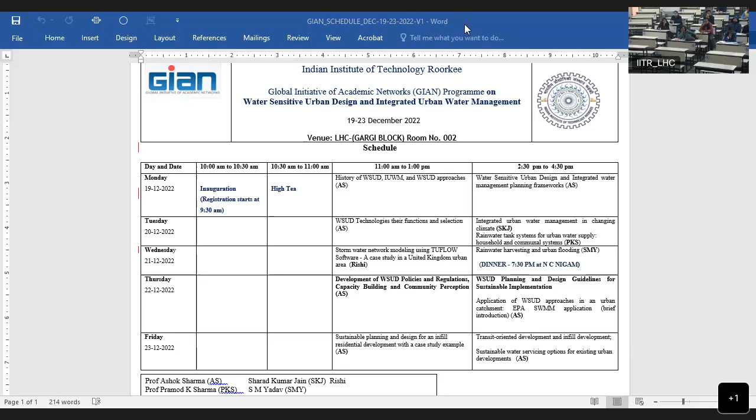These are some of the aspects we'll be covering, and then the climate change aspect Professor Jain will be talking about, and Dr. Sharma will be talking about rainwater. So we will be covering different aspects of urban water systems during those 5 days. This is a general introduction of what we're going to cover. I will start my first lecture on the history of water sensitive design, integrated water management, and decentralized systems. Just give us a minute, and I will go to my slides.

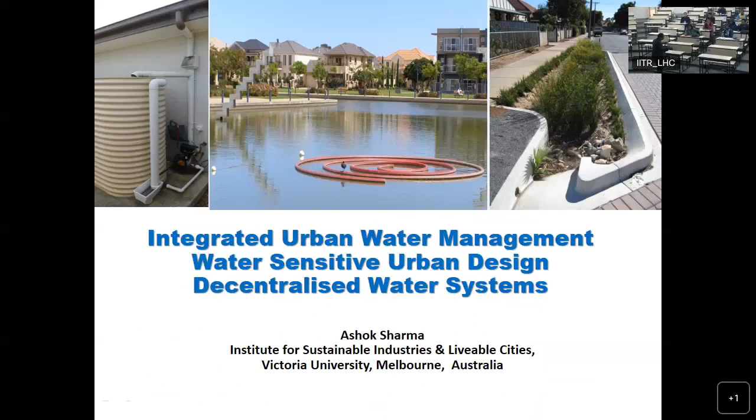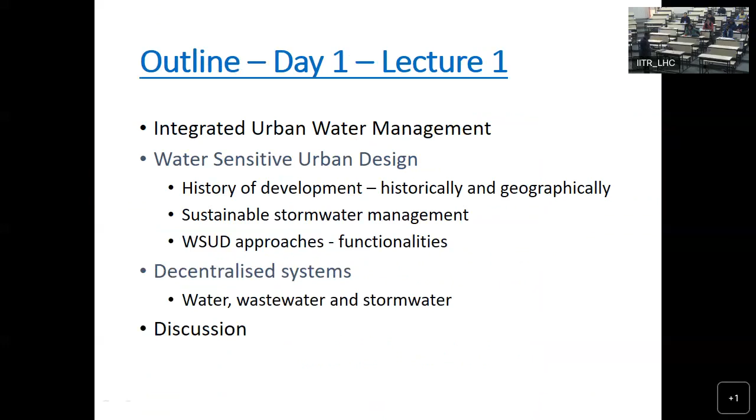So to start with, we will talk about what is integrated water management, water sensitive design, the history, and decentralized systems, and why we need to move from conventional systems to integrated water management. This is a general outline, and at the end we'll have some discussion about these types of systems. So why do we need these approaches? Because our existing conventional systems, which are normally centralized, are facing different constraints or challenges. One is population growth, resulting in urbanization, and climate variability, as there is a lot of discussion nowadays about climate change.

There will be different patterns of rainfall over time. There is a lot of work going on predicting what will be the impact, the expectation in future, and the nature of rainfall and evaporation in future. Because of that, there will be an impact on the existing water sources. That will also have an impact on stormwater systems because of the uncertainty in the intensity of rainfall. So we have to think about what impact that is going to have on our stormwater systems.

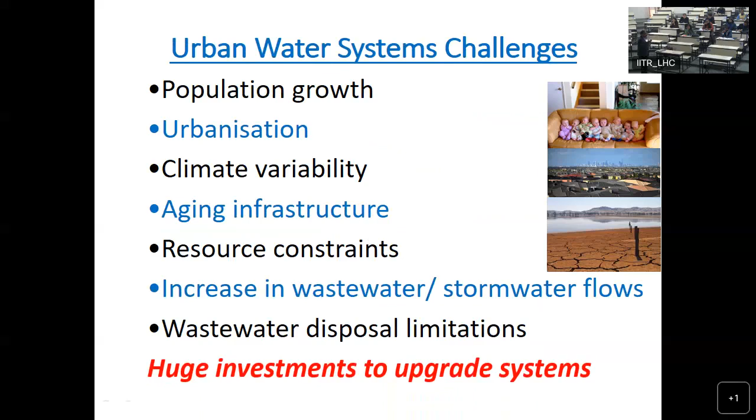But what is happening is that we are treating that water and supplying it to the urban areas, and from there, the stormwater and wastewater is collected or treated and then disposed to the receiving environment. But what is happening in the areas is that all the corners are expanding, so the boundaries are expanding. And also within the cities, there is a change in the density. So the demand for water and services is increasing further. And because of that, the existing system may not be sufficient in terms of sources and infrastructure capacity.

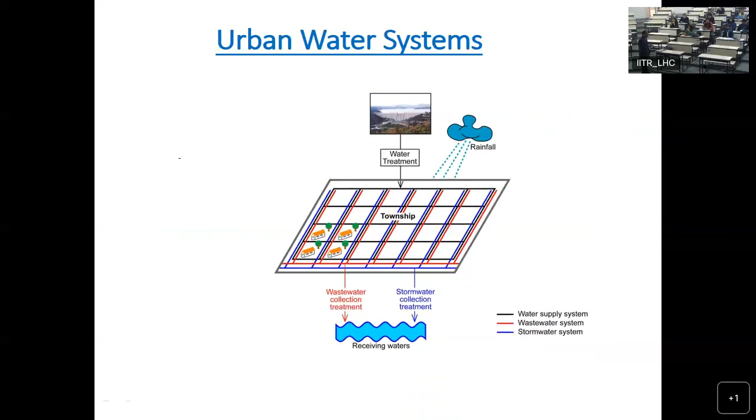So what can be done to some extent is that we can think of providing some approaches at the allotment scale by having rainwater tank systems. We can also have grey water applications, and we can also provide some type of stormwater detention approaches at allotment scale. And these types of approaches can be utilized in the existing environment and also in new development areas too.

And the second type of approach can be utilized at a larger scale, which can be cluster scale or development scale where new development areas are coming up, where we can have localized wastewater treatment and reuse. We can have communal rainwater tank systems, and we can also have water sensitive design to mitigate the impact and reduce the flow of stormwater.

So there can be different approaches, and that means we are talking about a hybrid type of system: one layer of centralized system, and we are putting another layer of decentralized systems. So these can be the future approaches which are being implemented in some parts of the world to see how we can reduce the expenditure on infrastructure by adopting alternative systems.

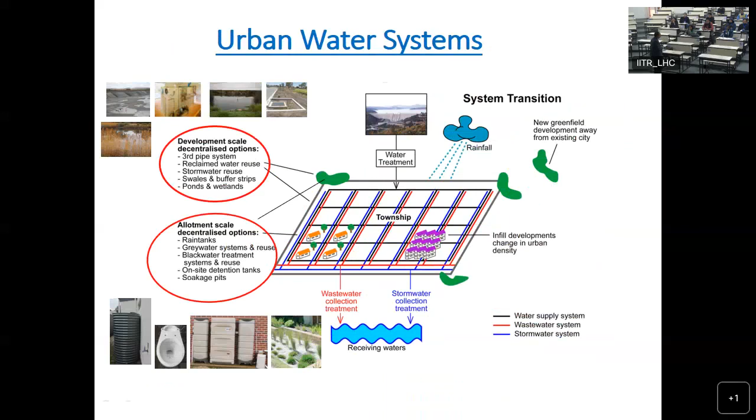So if we take the definition, there are a number of definitions of integrated water management, but this is one which is quite commonly used. Integrated urban water management is a comprehensive water management approach that demands consideration of the whole urban water system, from supply catchment to the receiving waters and all physical and non-physical influences on its performance.

For the system boundary, integrated water management approaches should cover from the source to the disposal point. In between, we have the whole infrastructure. So we are looking at the urban cycle as a whole, not only the urban areas, but where the water is being received and where the water is being disposed, the impact on the receiving environment and the impact on the environment from where we are taking the water. So integrated water management should cover the complete boundary of that environment.

And also we are talking about multiple stakeholders. So integrated water management also very closely considers the requirements of all these stakeholders.

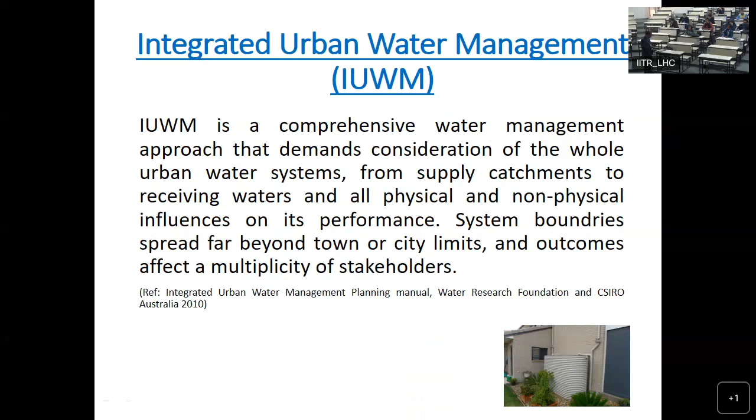There is another definition which is also widely used: integrated water management promotes a coordinated planning approach to drinking water, wastewater, and stormwater services that takes into consideration the broader implications of sustainable development, including energy demand, greenhouse gas emissions, waste generation, nutrient losses, life cycle cost, and community acceptability. So the community should be part of the overall implementation of integrated water management approaches.

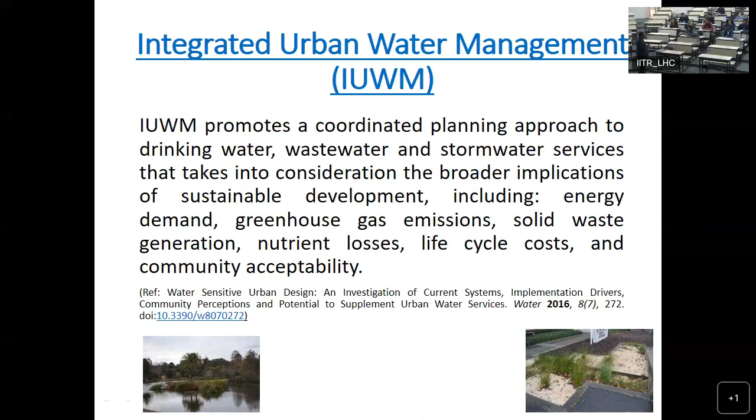What happens is that in many new development areas, there is no community, no one is living there. So normally we take the information about community acceptance from areas where communities are already living. So the information about liking and disliking of various systems, because with integrated water management approaches, there is a responsibility of the community too to manage some of the systems, which we will talk about later. The second type of approach which we normally talk about a lot is water sensitive design.

The definition which the Australian government developed is basically the integration of urban planning with the management, protection, and conservation of the urban water cycle. So the urban planning should include the protection and conservation of the urban water cycle. That ensures urban water management is sensitive to natural, hydrological, and ecological processes.

So the water sensitive design basically should integrate with the urban plan. That's the most important aspect of mitigating the impact of those challenges which we talked about. And mostly it is focused on stormwater management. And the idea is how we can reduce the pollutant loads, which have increased because of urbanization, and how we can reduce the overall flow into the natural environment or the receiving environment.

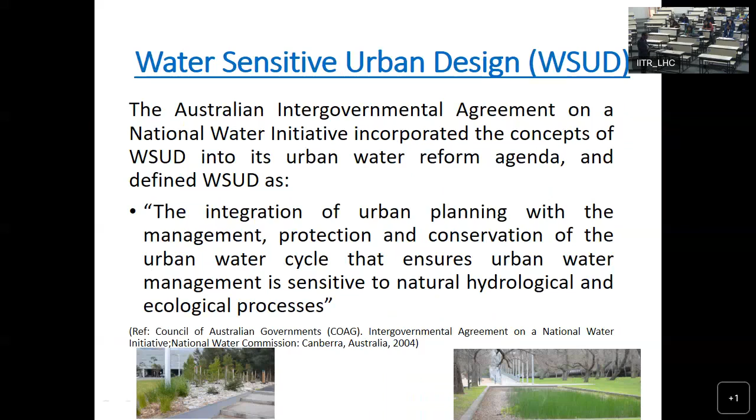So decentralized systems are basically systems that can provide water, wastewater, and stormwater services at the cluster, meaning a group of houses, or at a development scale, and that utilize alternative water resources, including rainwater, wastewater, and stormwater, based on fit for purpose. The term fit for purpose is the most important aspect: whether the source which is available is suitable for drinking or potable purposes or not. For example, in many rural parts of Australia, and maybe in India too, rainwater is one source for drinking purposes.

The wastewater which is locally treated can be utilized for irrigation of parks and gardens, and even the gardens which we have at house scale, allotment scale. So decentralized systems can be managed as a standalone system or integrated with a centralized system, meaning they can be part of a hybrid centralized and decentralized system. The advantage of this type of system is that wherever we are generating a resource or the resource is available, the network is very small.

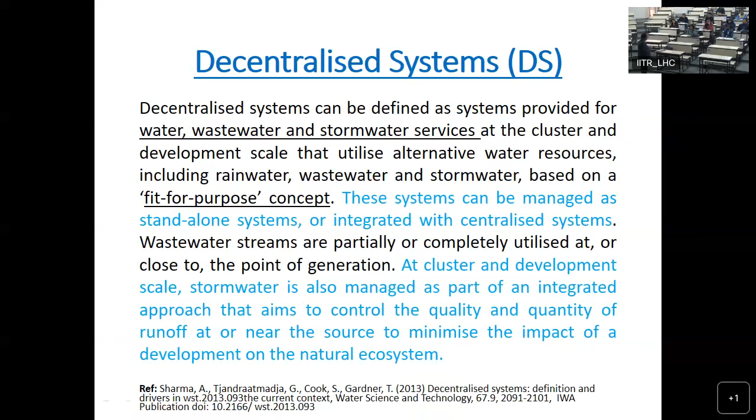Whether it is a supply network, a communal rainwater tank system or an individual rainwater tank system, we are treating the water of a few localized houses and supplying it back to the houses fit for purpose. Fit for purpose for wastewater is normally toilet flushing or garden watering. These types of systems are becoming very common in many parts of the world. In India too, rainwater harvesting is becoming a lot more popular because of those challenges. We will have one complete lecture on rainwater harvesting, modeling, and all those aspects. So these are some of the types of decentralized systems for water supply, wastewater treatment, and stormwater harvesting and reuse.

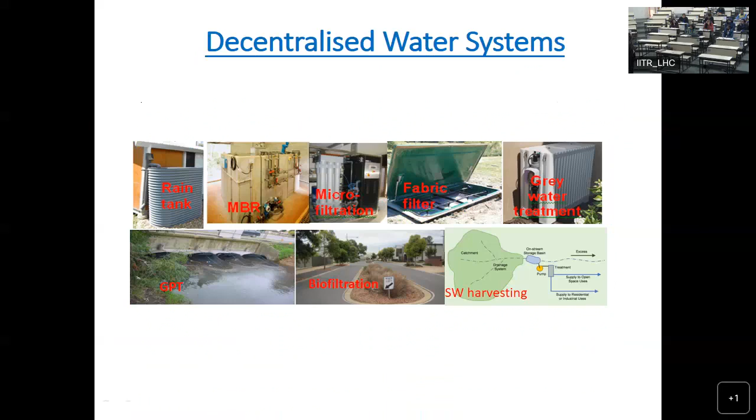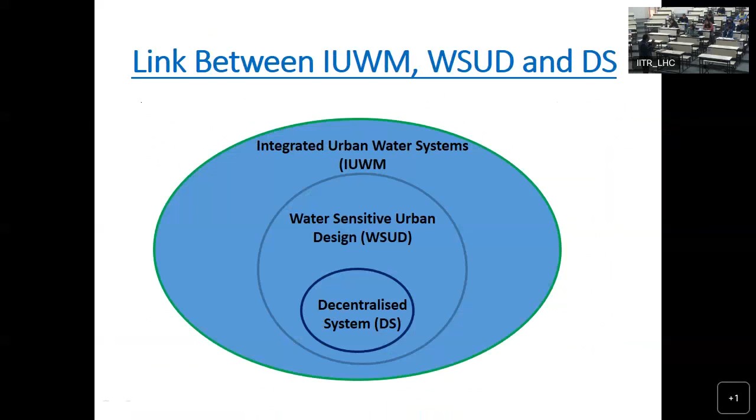Overall, if you see the link between integrated water management, water sensitive design, and decentralized systems, integrated water management is the overall picture, where decentralized systems and water sensitive design sit. So basically, everything is linked together in the overall planning of integrated water management approaches. We all know about the water sources which are available, and they should be utilized. In a decentralized system, it is a localized water resource: rainwater, wastewater and grey water treatment and reuse is possible. And sometimes we use a combination of various resources.

So for planning a new suburb, we will be sharing software which will help in looking at what resources can be utilized where, what impact that will have on potable water supply, and how much we can sustainably reduce the potable water supply from fresh water sources. The most important part to keep in mind is fit for purpose, and another aspect which is commonly implemented and encouraged by the government or water utilities is demand management: how we can reduce water demand, and to what extent.

For example, in Melbourne we have a target of 155. So one person should not utilize more than 155 liters of water per day. Earlier it was more than 250 or 260. Because of water shortage over time, they tried to encourage by different means how we can reduce water demand. So water conservation and demand management is a very important aspect of overall integrated water management.

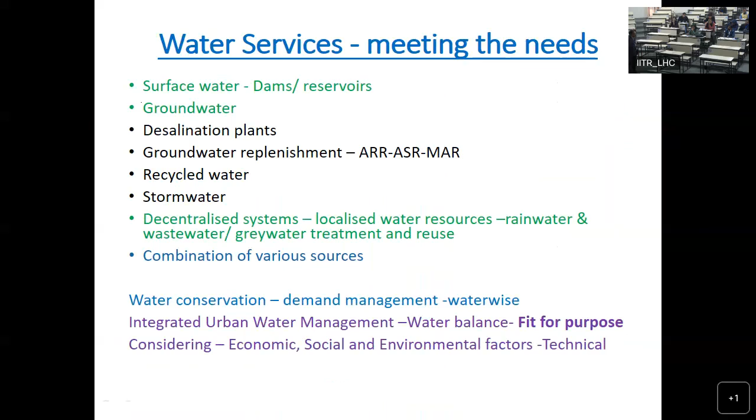So we talked about the total urban water cycle, and you can see that in the overall urban water cycle, the catchment, the urban area, and also looking at the alternative water sources which can be generated within the urban areas. And there is a lot of potential to utilize those resources.

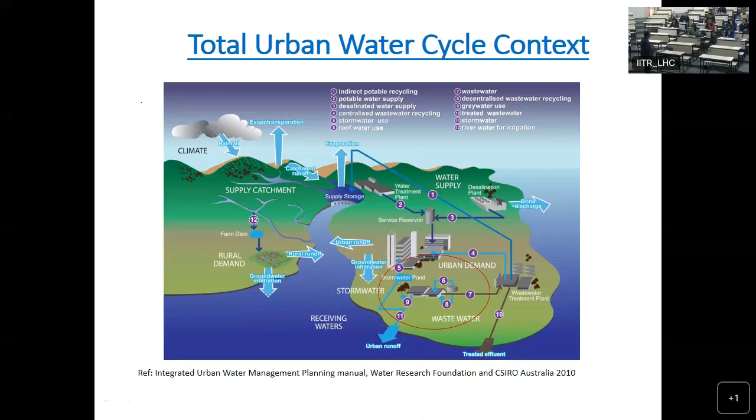As you can see in this diagram over here, there are decentralized system approaches which can also be implemented in looking at the overall total urban water cycle context. So decentralized systems, water sensitive urban design, has a very good potential and is an important aspect of overall planning of water systems in future.

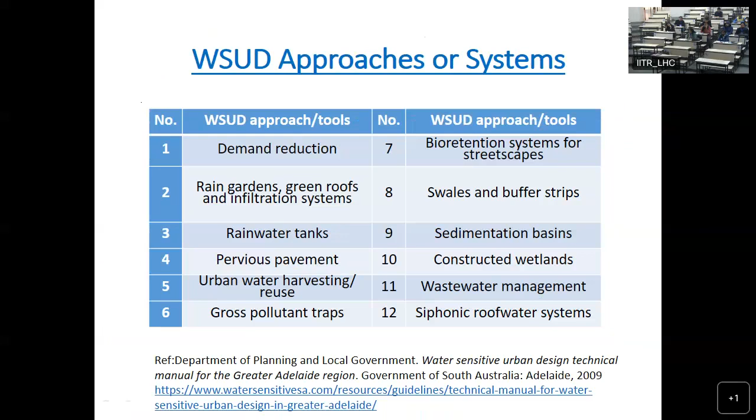Wastewater management locally and the siphonic roof water systems. This is basically what was developed at Adelaide University locally, but it has also been included in the water sensitive urban design approaches by Greater Adelaide Research. So we'll talk a little bit about these systems in our presentation.

So drivers for water sensitive urban design approaches. What are the benefits of providing these types of approaches or systems? Basically, since 1980, urban planning and development has increasingly taken into account the natural water and nutrient cycles, with water flow managed as would have occurred on the original greenfield site.

Basically, what we are talking about is that when we have a new urban development, whatever flows were coming at that time from that area, we will try to manage so that similar flows are there once the development has taken place. That means the nutrient loads, the flow, the peak flows, should be managed at the same level. And to do that, we have to apply water sensitive urban design approaches.

Basically, the idea is this way we can protect the ecology of our natural systems, because the water is finally discharged to natural water systems. So basically, these types of approaches can manage the stormwater quality and quantity, which is very essential. Otherwise, the flora and fauna in those natural systems will have significant impact.

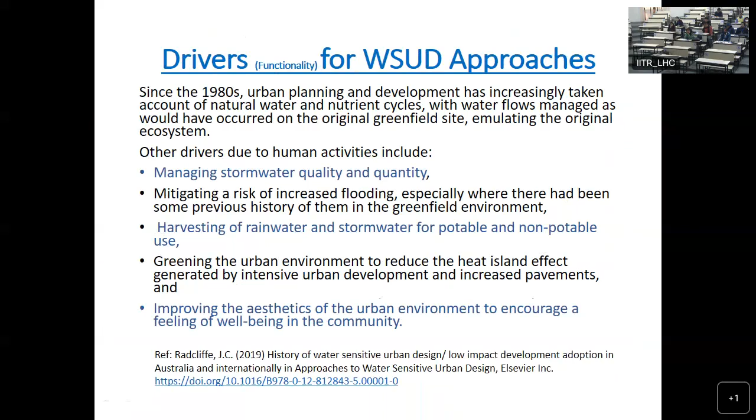So these are some of the drivers of implementing water sensitive urban design. And there is a reference which is available, and we will share with you. I will show you some of the published material and books after this session, where you can see the references, and also you can get more information and knowledge from those references.

So what is happening is progressive change in stormwater management because of this water sensitive design. The stormwater management has undergone progressive change since 1980, driven by an inevitable increase in impermeable surfaces, leading to an increase in stormwater runoff because of the urbanization, because of the decrease in the pervious areas. There is more impervious area. That's why the flow has increased.

Basically, we are talking about two types of responses. One is the detention of stormwater, basically stopping, keeping it for some time, and then releasing it slowly. So that means we can decrease the peak flows in the stormwater network. That's one aspect. So we are not reducing the quantity, but we are regulating the flow in this case. So basically, this can involve the construction of wetlands where we are holding for a short period and then releasing it. So we don't have to increase the capacity of the existing network system.

The other approach is basically retention. In retention, it is either the infiltration process, percolation, evaporation, and transpiration, and also the domestic use and industrial use. So these are some of the approaches where we can retain part of that stormwater. So all those water sensitive urban design approaches will be using those two approaches, either detention or retention. So basically, these are the two aspects which you have to consider a lot.

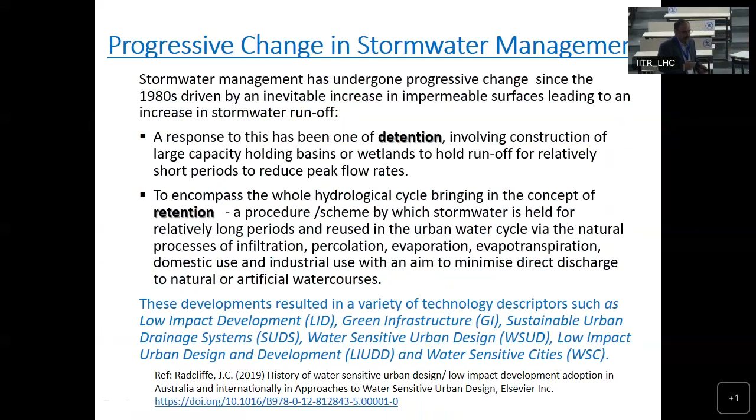I will go through some of the history of those terms, but overall, their functionality is the same. These approaches started in different parts of the world at different times. Engineers and professionals put different names to those terms, but ultimately it is the detention and retention aspect. More information can be seen in this chapter, which we will be sharing in a book. But you can download that information.

So if you're looking at the history of water sensitive design, initially it was more supplying water. So it became the water supply cities. We start with that. Then there were issues with public health many years ago. Then the sewer systems developed. You might have heard in history there was cholera and others because of urban human waste, because of the rainfall. So many diseases developed because it was not properly disposed of away from the urban areas. Then the sewer system developed at that time.

The next development was the drainage city, removing the stormwater away from the urban areas. After that, we tried to look into the waterways, protecting the receiving environment. Then the overall urban water cycle of the city, starting from catchment to the disposal. And the drivers were fit-for-purpose sources, conservation, promoting waterway protection. And now we are somewhere here, water sensitive cities, where the drivers are adaptation, multifunctional infrastructure, and urban design reinforcing water sensitive behaviors.

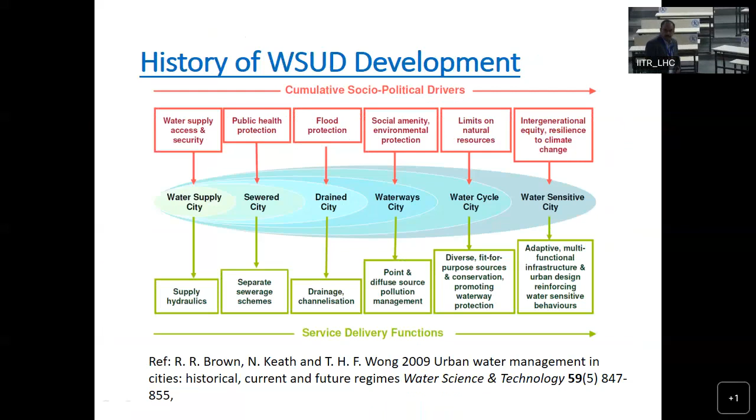So now we'll talk a little bit about these terms, in which country and which part of the world these terms are being used. So in the United States of America, they call it low impact development or green infrastructure. Initially it was reported somewhere in 1977, covering land use planning in Vermont. And then the US EPA developed some guidelines for the Clean Water Act. And LID focused on stormwater quality and peak discharges, basically the same aspect. So there is not much of a difference between water sensitive design and low impact development.

Their focus was the same, but the drivers were different in different parts of the world. We'll talk a little bit more on those. So basically, LID focused on stormwater quality and peak discharges, complemented with the concept of green infrastructure, which links landscape architecture and urban ecosystems with water cycle management.

So green infrastructure is the incorporation of green roofs, green walls, rain gardens, swales, permeable pavements, improved infiltration, wetlands, and green spaces. Basically, this is all about those approaches we talked about in the water system and so on. This was initiated somewhere in 1977 in the US with the name of low impact development and green infrastructure.

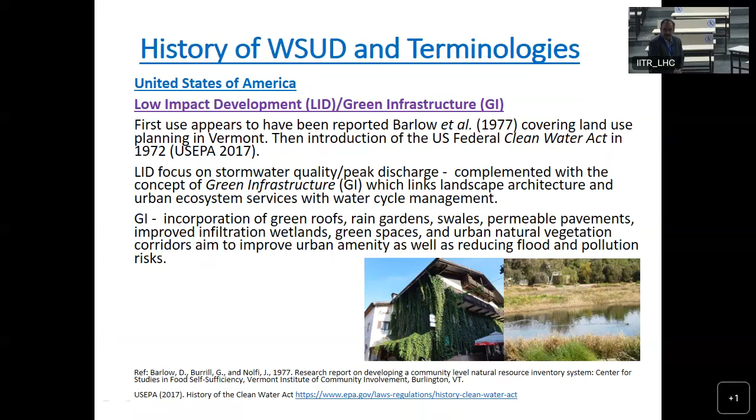In Canada, it is low impact development again, because they're neighboring countries, so they picked up the same name. But over here, it was initiated somewhere in the late 1970s. They first developed detention basins on ditch and pipe systems. So basically, they wanted to reduce the flow in the pipe network in the case of stormwater.

In 1992, the province of British Columbia generated a stormwater planning guideline that recognized detention ponds, which can mitigate flooding. That way they started, and now they have developed guidelines for the water system design. The 13 LID structures are listed in those planning guidelines. There is a reference provided which will help you if you are interested to look at more information about LID in Canada.

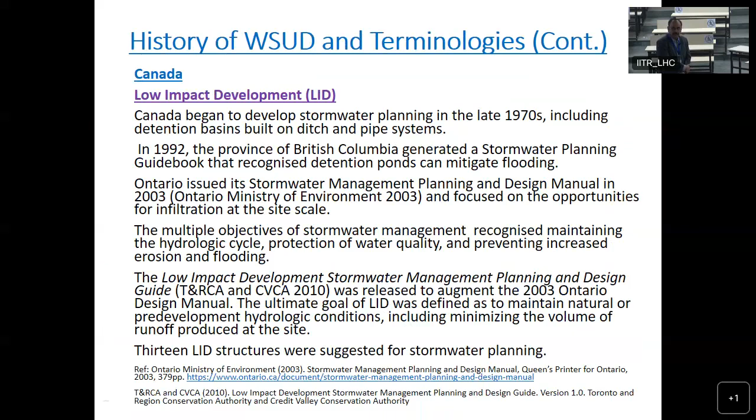In the United Kingdom, they call it Sustainable Urban Drainage Systems. The concept was developed in the UK, with guidelines published in 2000 for Scotland and Northern Ireland, and separately for England and Wales. So they started developing guidelines on how to design and provide those systems, but they called them sustainable urban drainage systems.

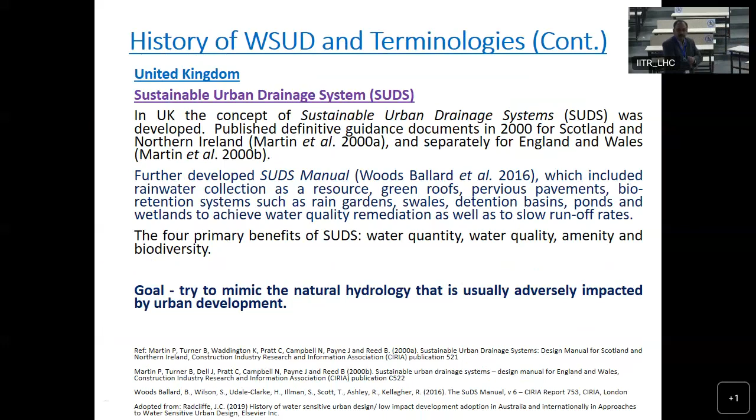The goal was to try to mimic the natural hydrology that is usually adversely impacted by the urban environment. So, looking at the urban development which is coming up, how we can have a similar flow and stormwater quality to what was there before any development. That was the main goal in adopting these types of systems and approaches.

In Germany, they call it decentralized urban design, DUD. Germany also began adopting water systems, SUDS and water sensitive design. I think there is a reference available from 2009. They also have developed guidelines. Basically, they also focused on water and stormwater flows which are heavily polluted, and the idea was to reduce the pollutant load using those approaches. So water system design is mainly focused on stormwater management, both quality and quantity, in almost all parts, but stormwater harvesting is becoming another aspect of management.

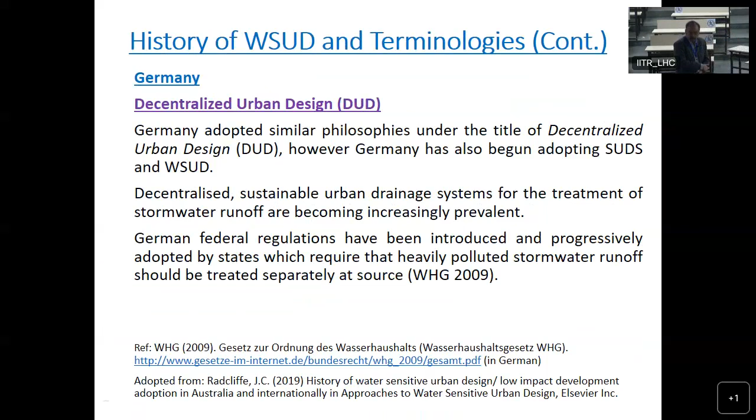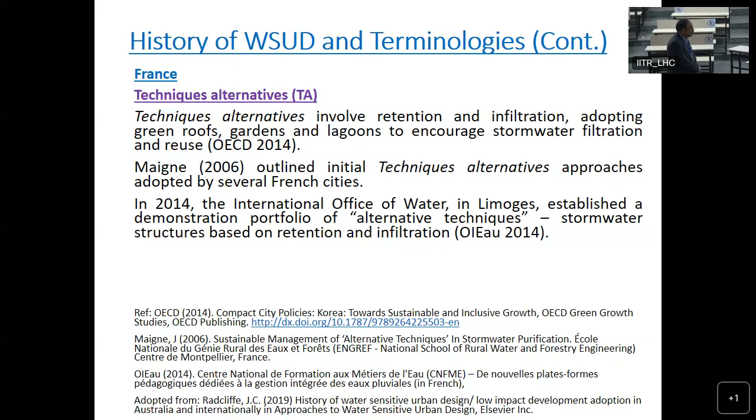In France, they are also using alternative techniques. These are retention and infiltration, adopting green roofs, gardens and lagoons to encourage stormwater filtration and reuse. Basically, again, the same. And in 2014, the International Office of Water established a demonstration portfolio of alternative techniques. So they also started using them, but the reference is available from 2014. Basically, similar approaches are being used in France too.

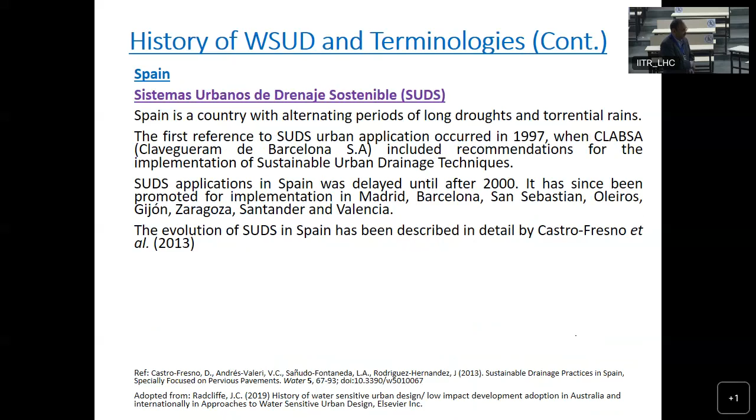But I think you can see that in the US and UK, they're more prominently used and developed much earlier, before the other parties started taking them up. In Spain, they also have similar sustainable urban drainage systems, and they also started developing guidelines for designing those systems. Basically, again, the same type of retention systems with the aim to manage stormwater.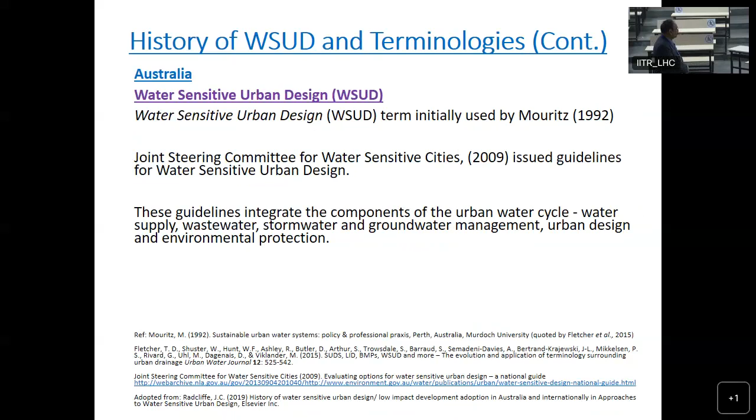The guidelines provided in Australia specifically indicate that when you have a development, there should be an 80% reduction in total suspended solids, 45% reduction in total phosphorus, 45% reduction in total nitrogen, and 90% reduction in gross pollutants. So basically, any developer developing a new area has to show, by adopting these guidelines, how they're going to reduce the total pollutant loads generated by the new urban development.

And the most important aspect you can see here is that the post-development peak 1 year ARI flow should be the same as before the development. That is a very important aspect: pre-development and post-development 1 year ARI flow should be the same, as close as possible. That's why they have to adopt different approaches based on the size of the development. Which approach will be more suitable?

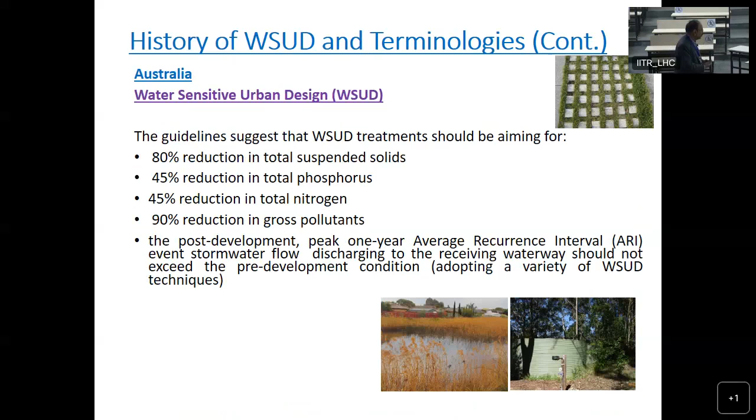New Zealand is also having similar approaches, and they started sometime in 1991. They call it low impact urban design and development. The name is different, but the approaches are almost the same. And they have also developed their guidelines, which are available through the New Zealand standard NZS 4404.

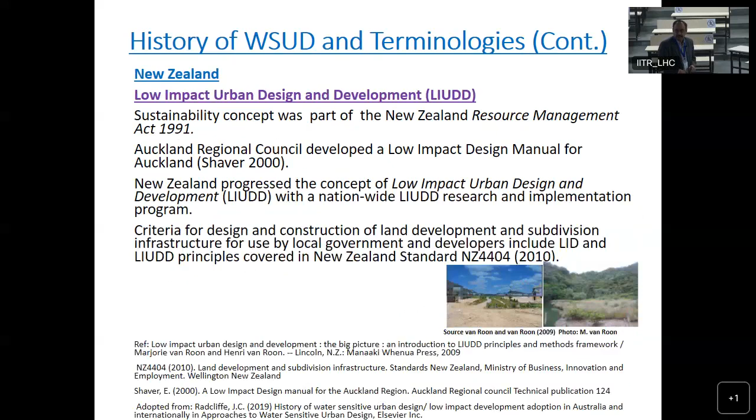China is quite active recently in management of stormwater. They call it sponge city. And basically, they want their cities to absorb all the stormwater which is being generated. The shortage of water resources and pollution of the water environment has become a constraining factor in the sustainable development of China. So their president in 2013 talked about sponge cities where stormwater can be naturally conserved, infiltrated, and purified for potential reuse.

So that is a driver, an initiative coming from the top. And their target is that under the guidelines, cities in China are to collect and utilize 70% of the stormwater, with 20% of urban areas meeting the target by 2020. And the proportion will increase to 80% by 2030. So there is a lot of pressure on cities to adopt sponge cities to manage the stormwater, because the driver is the shortage of water resources and pollution of the water environment because of urbanization and the increase in flows.

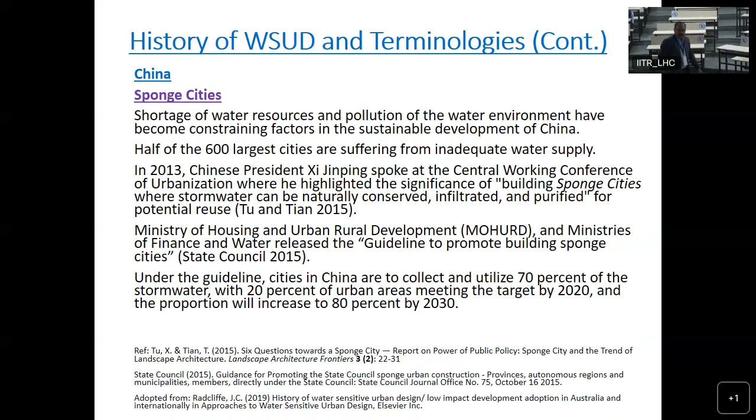In developing countries, some parts are starting to adopt water sensitive design approaches. They call it low impact development, water sensitive urban design. But the difficult part is that it is difficult for urban developments and redevelopments to address the sustainability of water where a significant portion of the population still doesn't have access to basic water and sanitation. That is a limiting factor. So before we start thinking of water sensitive design and low impact development, we have to provide basic services, and that is a challenge. In some parts of India, we are also facing similar challenges. So these approaches are good, but you need a significant amount of resources to provide those services.

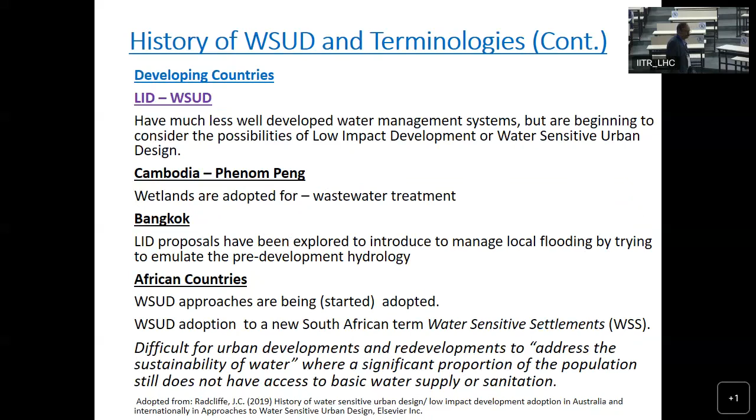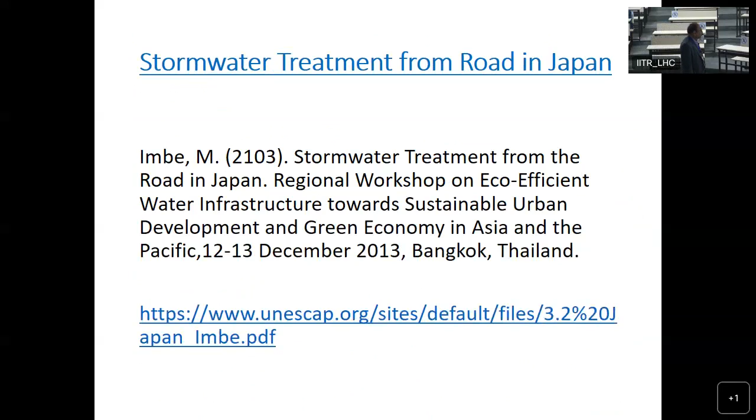In Japan also, they are starting to use water sensitive design approaches. So in conclusion, what we can say is the principles are increasingly being recognized with different terms. Basically, they're the same, but the drivers can be different. In Europe, the focus is on sewer overflow protection and flood management, together with access to green space. In the USA, they focus on water quality protection, green space aesthetics, and flood mitigation.

In Australia, they focus on waterway ecosystem protection, littoral zone conservation, in coastal parts, because most of the cities in Australia are along the coast. So whatever we are discharging, the receiving environment is basically the sea. In China, the focus is on stormwater harvesting and environmental protection because of the shortage of resources and the impact on the environment. The WSUD/LID principle seeks to mimic the natural hydrology of a site by using decentralized management measures. Basically, these are decentralized approaches.

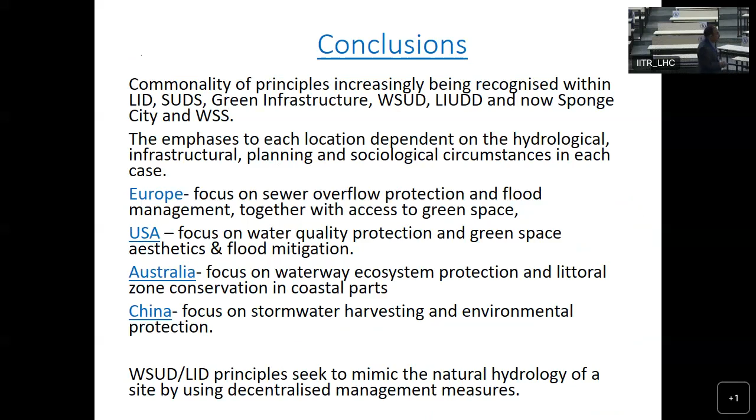Okay. Still, we have some time, so maybe we can have some discussion about the implementation of these approaches in India. You can also share your experiences, those who are working in industry or conducting research, what difficulties they face and what changes they think are required. The initiative by the government is a very important part, but the community too can contribute.

What we have seen in Australia is that the state started encouraging community householders to have rainwater tanks. Those who were more inclined towards protecting the environment started putting their own money into installing rainwater tanks. On the other hand, the state also provided some subsidies for installing rainwater tank systems. And at some point, because for 10 years there was a drought and very limited water available in the dams for water supply, the state enforced new homes to have rainwater tank systems.

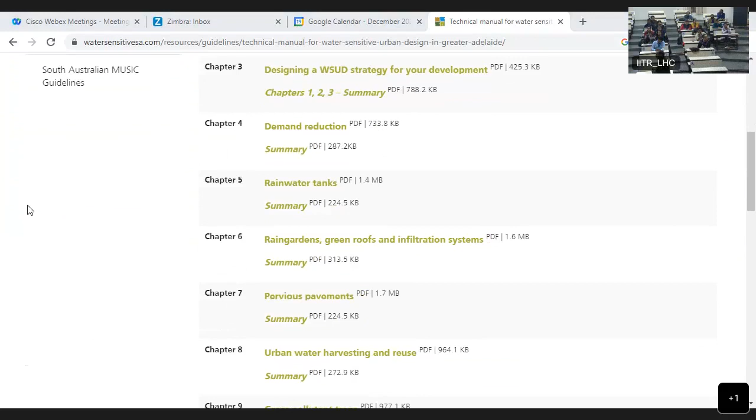So I talked about some of the design guidelines for different types of management design approaches. You can all go to that website when you have time and download them. I think this reference is already in one of my slides. They talk about everything from demand management to rainwater tanks, rain gardens, green roofs and infiltration systems. It is quite comprehensive documentation done by the South Australian government.

There are many other guidelines too. We will have one session on guidelines on water sensitive design, but I found this one quite comprehensive. It talks about each and every water sensitive design approach. You can download all those documents. They are freely available and very comprehensively written.

So I will go through a little bit more. They talk mainly about both design and planning, and you will see quite detailed information available. They cover pervious pavements, rain gardens, green roofs, and green walls.

So there are others, and wetlands. So there are 14 or 15 chapters which are available under those guidelines, talking about each and every system, their design, planning, and also some of the examples are also given.

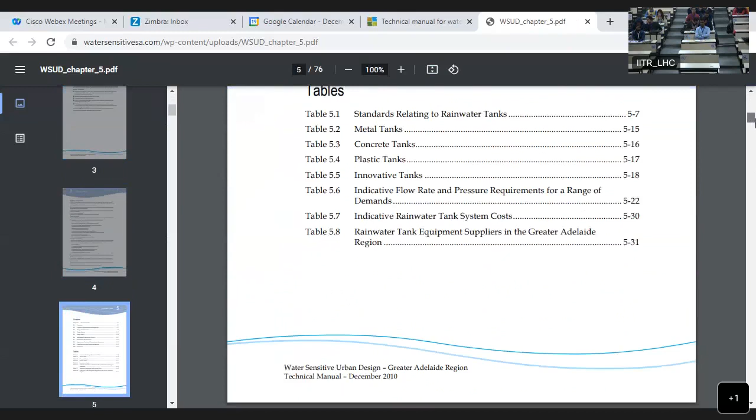Although we'll be talking about rainwater tanks a lot in one of our sessions, if you see this, there are a number of models available specifically for designing, basically identifying the capacity of rainwater tank systems. And as you know, the capacity or size of the rainwater tank system depends upon a number of factors. One, what is the roof area connected to it? Number two is the rainfall pattern. Where there is quite uniform rainfall, more water is available for application because the use of rainwater from the tank is quite regular.

Say, for example, in some cases, with basic treatment like UV, depending on the quality and the type of roof, because different types of roof can have different pollutants even in rainwater. So the rainwater quality is not 100% suitable for direct use. You need some basic treatment for it. Otherwise, you have to use it for other purposes, like toilet flushing or garden watering. So roof area is one very important factor. Then, what is the regular demand for it?